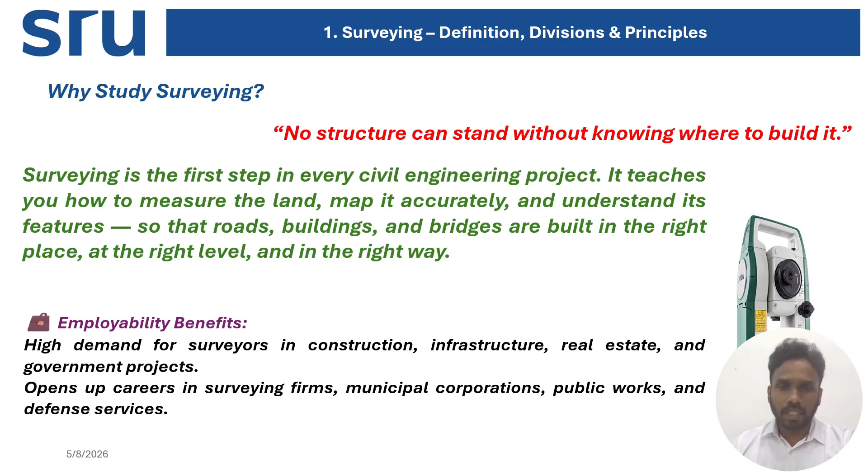So what is the employability benefit of studying surveying? There's a high demand in construction, infrastructure, real estate, and government projects, because for everything you need a surveyor to start your construction. It opens up surveying firms, municipal corporations, public works and defense services. They completely depend on the survey engineer to initiate any construction work.

Now we're going to see the definition of survey. Surveying is a science and art to determine the relative position of a point above or beneath the surface. You have to find the point. For example, if you are constructing a house, first you should regulate your boundaries. Your boundary should be identified. That boundary has some endpoints where you are marking or starting.

Within that boundary is your land, you can do whatever you want, but it shouldn't go into other boundaries, because they belong to someone else. So to locate that point on the ground, either on top or below, it can be done with direct or indirect measurements: you need distance, direction, and elevation. Collecting this data required for mapping, construction, and land development is called survey.

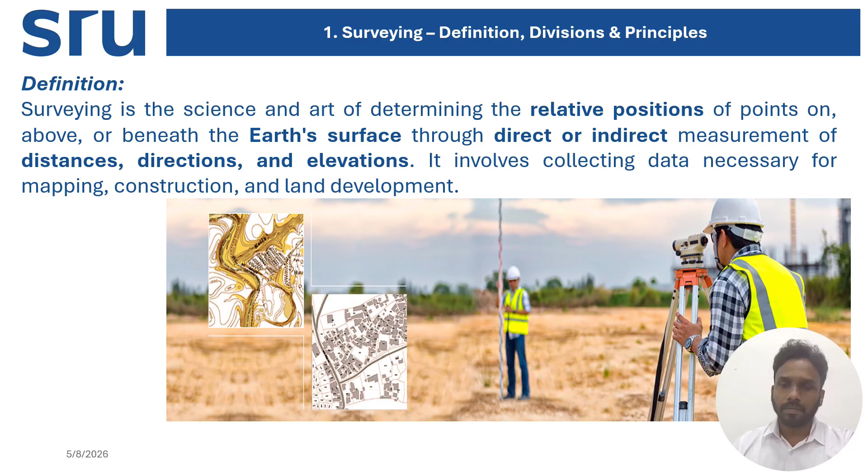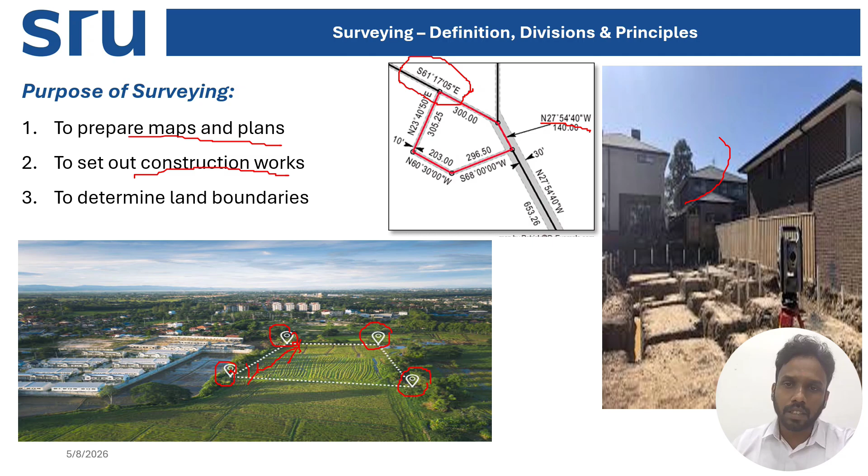Then, to set out construction work. You can see in this picture a construction work going on. You are going to set out the boundaries. First you set out the boundaries on these lines, then you mark your plinth beam as required. Everything can be done with an instrument, the theodolite. That is setting out your construction work.

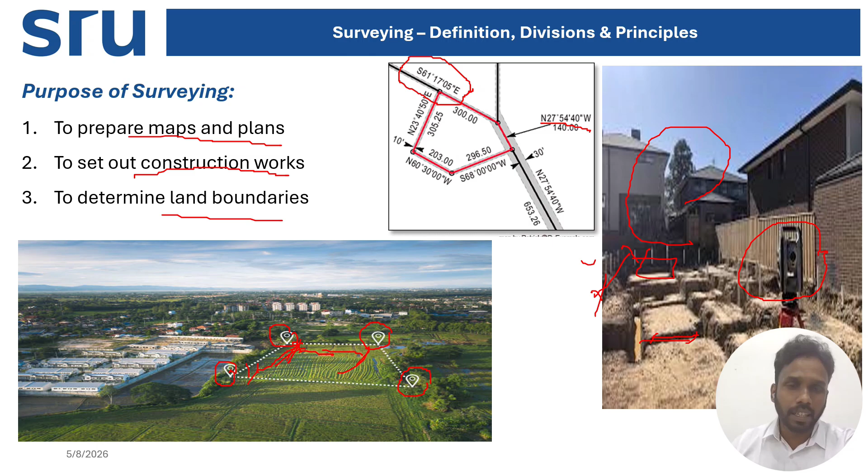Then determining the land boundaries. You can determine the land boundaries and measure the length of your boundary. From your measurement book, you can transfer that to your ground area, which is mandatory for your survey. These are the purposes of survey.

Then divisions of surveying. There are two divisions: one is plane surveying, the next is geodetic surveying. What is plane surveying? In plane surveying, you assume the earth is flat, and it is used for small areas. You assume the earth is flat, but actually the earth is not flat.

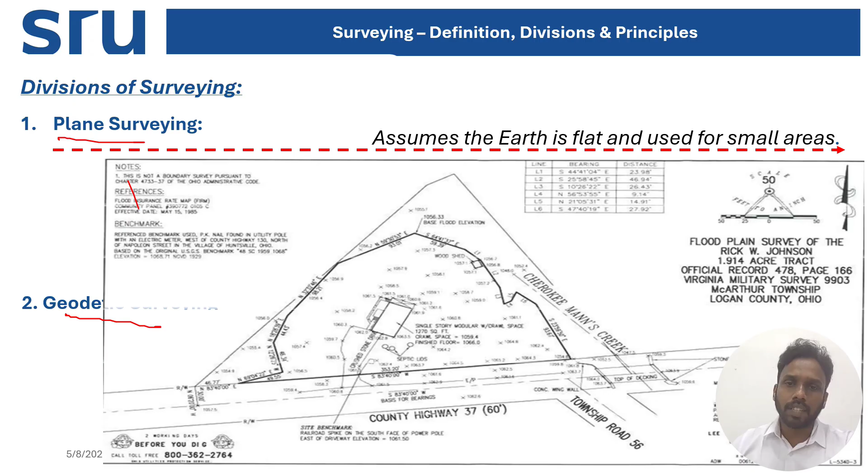So next, going to geodetic surveying. In this, you are considering the earth's curvature, used for large scale and precise surveys. Okay. So if you are doing your surveying for a very huge area, then you have to consider your earth as curved, so you can make your measurement very precisely.

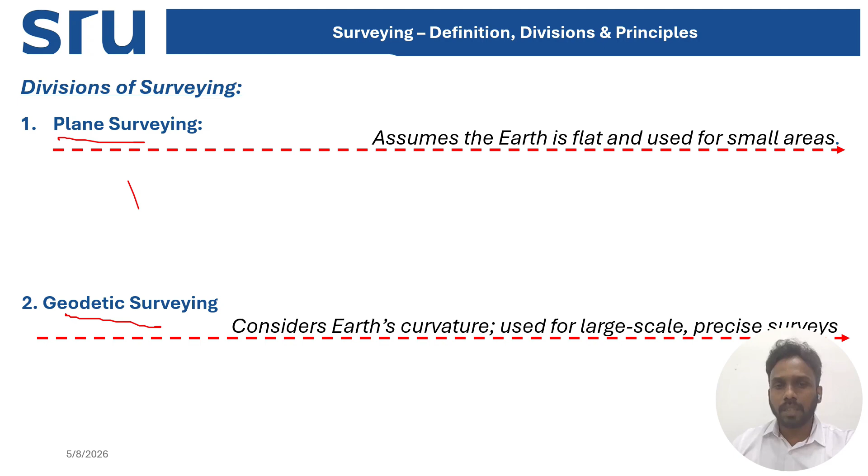So based on purpose. Okay. How you are classifying your surveying based on purpose. First one is topographical survey. Next one is cadastral. Next, engineering, hydrographic, and the next one is astronomical survey.

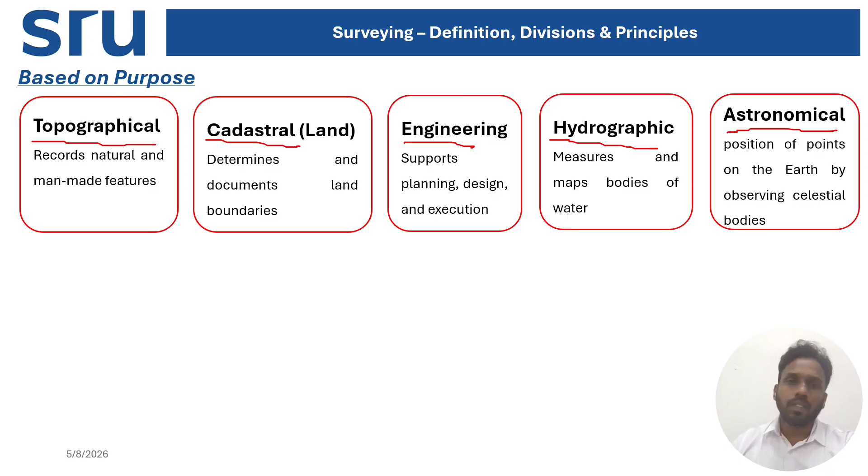When you're doing your surveying in a huge area, especially for road construction, railway construction, or any other work done by a government, then this engineering survey is supportive.

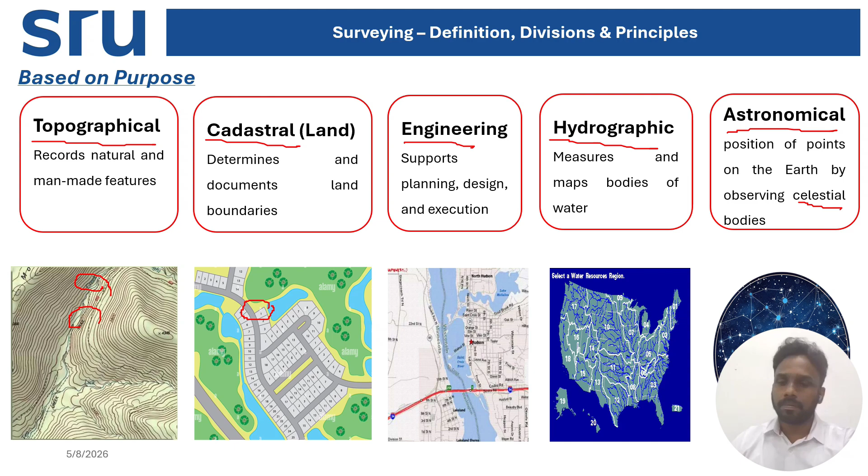So what they'll do first, they will fix the outer boundaries. From the outer boundaries, they'll start measuring the inner area, which will give an accurate, precise value of your entire area. This is suitable for a smaller area because you are fixing your boundary. When your boundary is small, you can directly measure from the outer area, quantifying the area inside your larger area, which gives an accurate measurement of your particular plot.

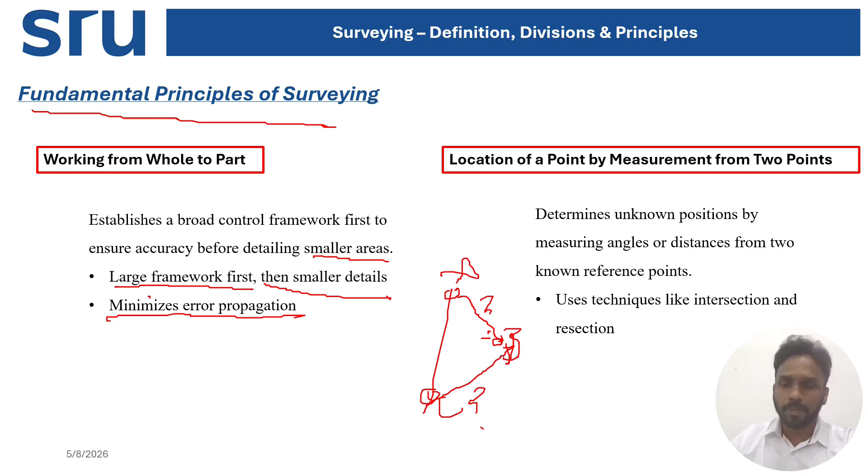Then you are segregating your area into smaller triangles. You may have a question why we should divide your area into smaller triangles. You can use a rectangle, a circle, a triangle, or a square. But the thing is, only triangle is a shape which can easily accommodate any irregular shape.

Even though your shape is irregular, you can divide your entire area into small triangles. If you are dividing your area into small triangles, you will not leave any vacant space which is not measurable. That is the reason why we go with triangle shapes to fit into the irregular shapes of your plot.

So when you are adding all the areas of all the triangles, you'll get the total area of your irregular plot. You can cross verify it with your book because you are paying for each and every square foot of area. You shouldn't encroach other area, but you shouldn't lose the area that belongs to you. So everything is paid, everything is accountable.

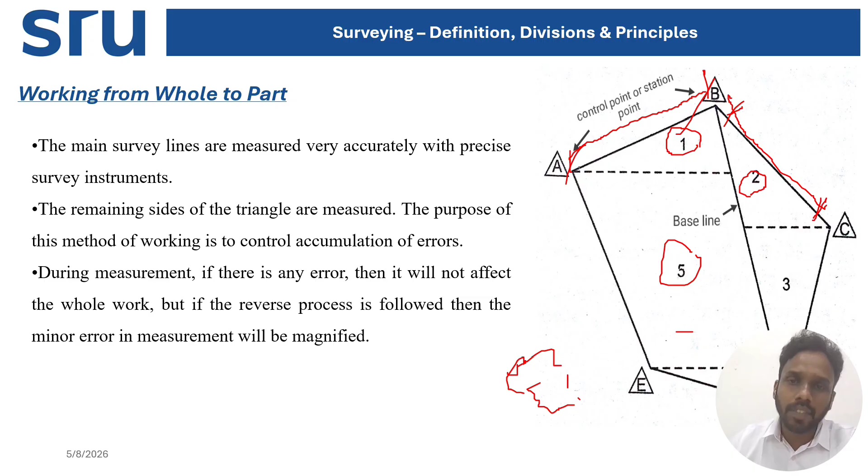So the thing is, you shouldn't encroach other area, but you shouldn't lose these things. So if you are dealing with these kinds of plots, you can use this working from whole to part method.

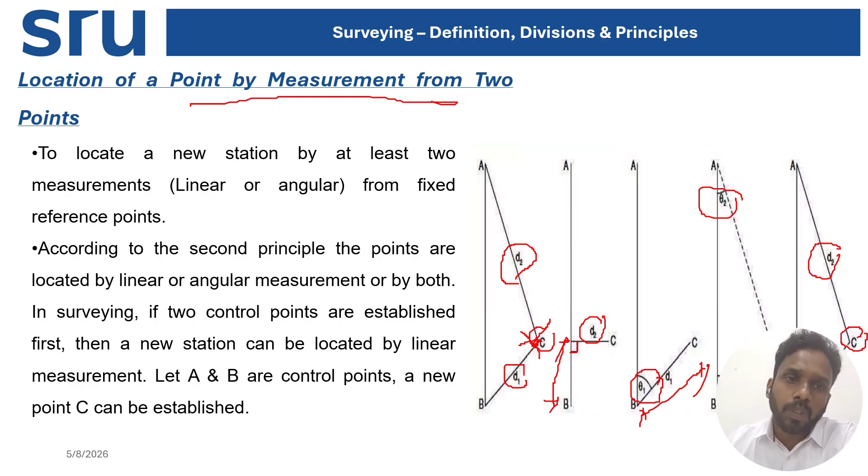This kind of measurement is called location of a point by measurement from two points. So these are the two principles of a survey.

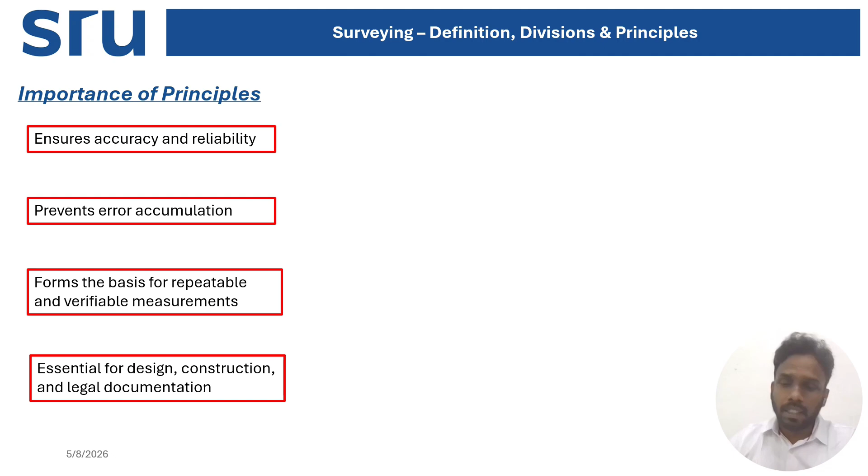Next, what are the importance of principles? First, it ensures accuracy and reliability. Surveying principles guide precise data collection and minimize mistakes. As discussed earlier, there are two principles required to reduce error, since there are huge possibilities of human error that should be eliminated.

Next is prevent error accumulation. There are two types of error: one is negligible, one is cumulative. If it is a cumulative error, you have to restart your entire survey from the beginning. To avoid this, you use the principles of surveying, which avoid compounding inaccuracy across the project area. If you are measuring distances between a large number of points and you start with an error, the measurements for the entire day become wrong. This kind of thing can be avoided.

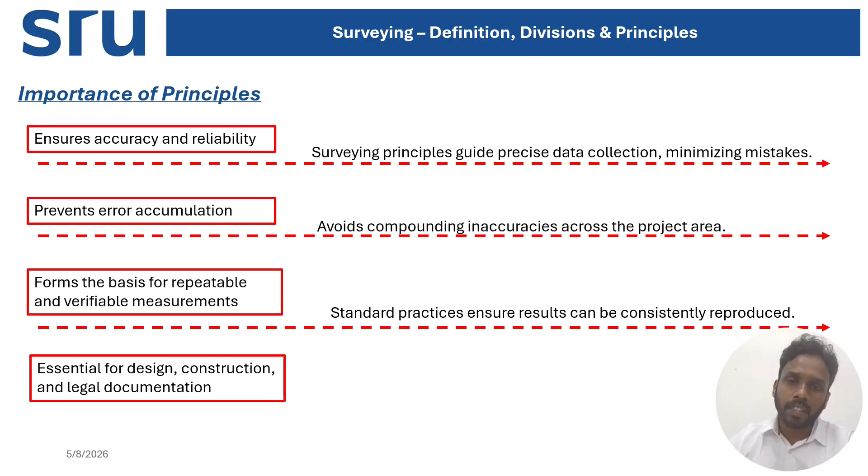Next, these principles form the basis of repeatable and verifiable measurement. If you have doubt about your measurement and you're using these principles, you can clearly verify it. This is the standard practice for both principles, ensuring results can be consistently reproduced. If you want to redo it, you can, because this is a standard procedure with standard requirements to follow.

Then, these principles are essential for design, construction, and legal documenting. Accurate survey supports safe design and execution of work, and since you are paying for every square foot of land, everything is accountable. You should not be lenient with your documenting; it should be accurate and precise. What you have paid for, you should get that land, and you shouldn't encroach other plots also.

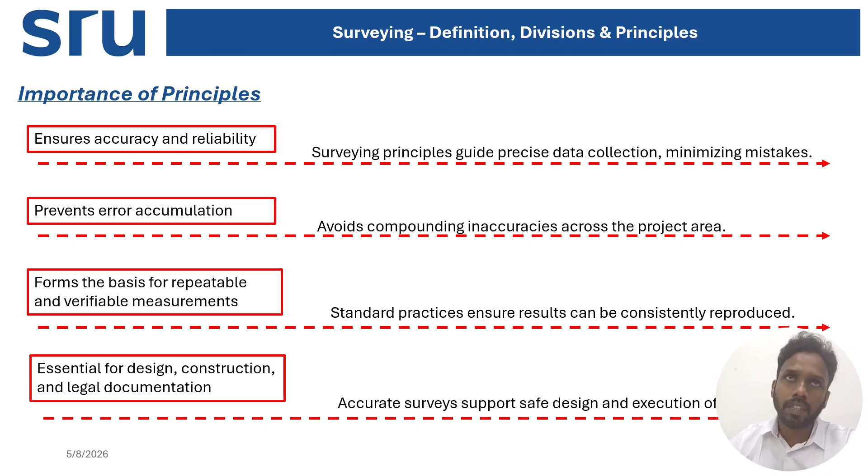Next, classification of surveying. After seeing what surveying is and the basis and principles of surveying, now we'll see classification of surveying. Here we have four things: first, based on instrument; next, based on methods.

Based on instrument, surveying is classified into chain surveying, compass surveying, theodolite surveying, plane table surveying, total station, GPS surveying, and drone and photogrammetry surveying. Then based on method: triangulation, traversing, leveling, and tacheometry.

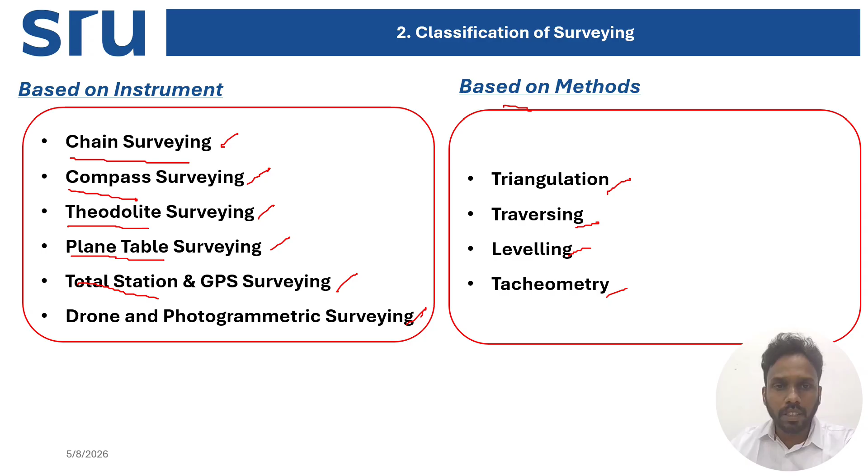When dealing with based on instrument: chain surveying is when you survey with a chain, so this depends on the instrument used. If done with a compass, it's compass surveying. If done with a theodolite, it's theodolite surveying. If done with a plane table, it's plane table surveying. We use total station and GPS for very precise estimates, called total station and GPS surveying. When dealing with drone and photogrammetry surveying, it's called drone photogrammetry surveying. So this depends on the instrument, named after the instrument used.

Then method: there are four methods. Triangulation is when you segregate your area, working from whole to part, dividing the area into small triangles. When dealing with a continuous open traverse or closed traverse, measuring a boundary with a formula to calculate area, it's called traversing. Leveling involves calculating the RL, reduced level, of your area and regulating water flow - all dealt with in leveling. When doing leveling and measuring distance to inaccessible points, that's called tacheometry.

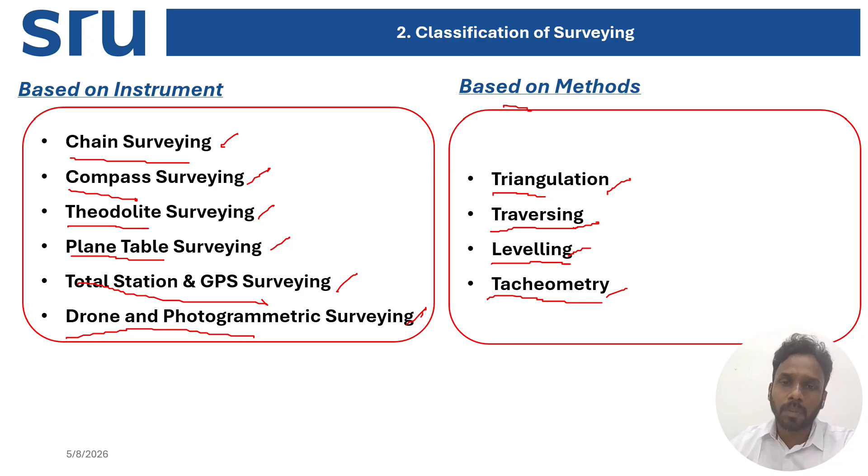Now we'll see these in detail. The first one is chain survey, the basic and simplest type of surveying. You can only measure linear measurement - just the distance - using an instrument made of a chain or tape. You cannot measure angular measurement because you cannot measure the inclination of lines; that cannot be measured. You can just measure the distance between two points. This is a simple and ancient method of surveying.

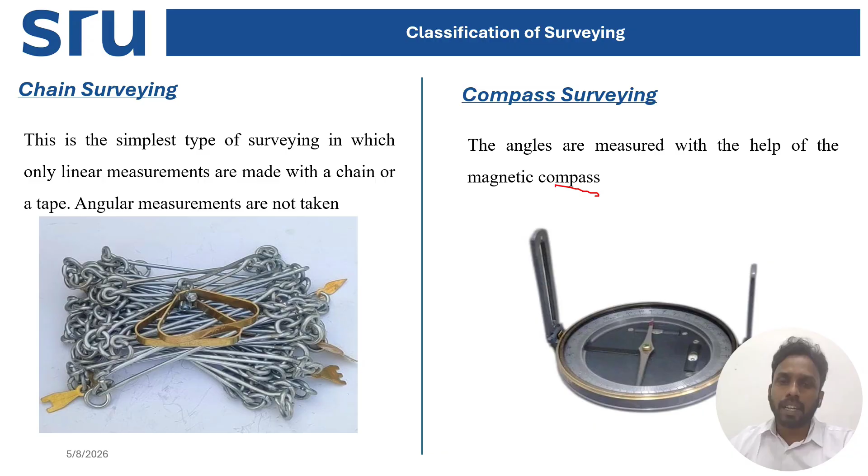Then compass surveying: when you want to measure the bearing (not an angle) between your lines, that is called compass survey. With respect to bearing, the difference between your forward bearing and back bearing gives you the included angle between your lines. That is called compass survey.

The next one is theodolite survey. When you are using a theodolite for your survey to measure your horizontal and vertical angles, this surveying is called theodolite surveying.

This instrument is a very precise instrument which is mounted on a tripod. It gives you the angle accurate to seconds and minutes.

Then plane table survey, this is an older method. This is a graphical method. In all the previous methods, you have to measure and then reproduce your results in a drawing.

Here you can directly reproduce your results in a survey, which is a graphical method in which field observation and plotting are done simultaneously.

So this is an older method of surveying. You can use it when dealing with normal surveying, but when dealing with high precision, accurate measurement, this method is not suitable.

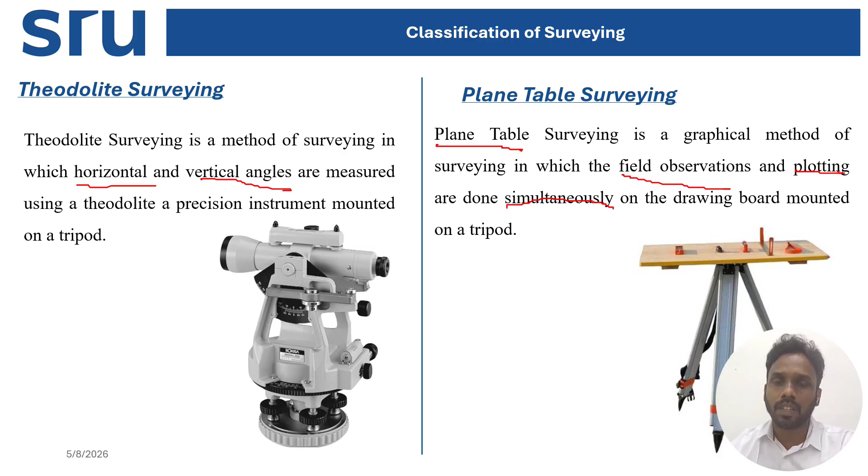Then total station and GPS. When doing measurement with the total station, you can use it. It is an electronic and optical instrument that combines a theodolite for angle measurement and electronic distance measurement for distance.

So you are using theodolite for angle measurement and EDM for distance measurement. Everything is combined in a single equipment called total station, which gives you triangulation, traversing, distance, and area. Everything can be calculated with this single instrument.

Then GPS is used to get a regulated and precise position of latitude, longitude, and elevation of a point on Earth's surface. So when dealing with a huge area, you want to locate your point with respect to latitude and longitude.

With respect to direction, and elevation can be given with this handy and sophisticated equipment. This is called GPS surveying.

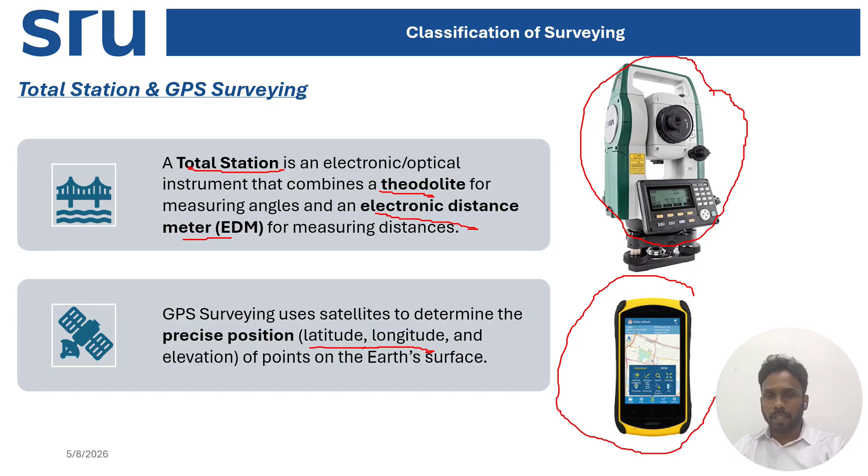The next one is drone surveying. This is the latest and most precise equipment, used for unaccessible points. You use a drone, which is called an unmanned aerial vehicle.

It is equipped with a camera, LiDAR, and other sensors to capture data on top of the Earth's surface. This is called drone surveying.

Next is photogrammetry. The science of measurement done in 3D model and 2D photography, which is often captured by drone, aircraft, or ground camera. This type of surveying is called photogrammetry, which is used very precisely to give you distance at unaccessible points.

You can easily measure these points. This is a very less time consuming and sophisticated method of surveying because you don't need a huge manpower to execute these tasks.

If you are well equipped and well trained in operating your drone, you can easily capture a huge area single-handedly, because everything is done using the drone.

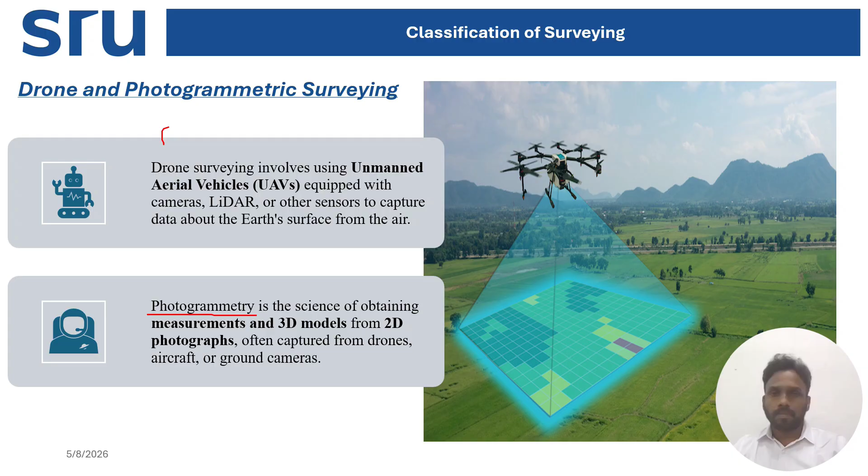Next we are going to see classification of surveying based on methods. Up to now we have seen classification of surveying based on equipment. Now we will see classification of surveying based on method.

The first one is triangulation. As we have seen earlier, measuring your area by segregating it into small triangles is called triangulation.

This is done to determine the position of points spread over a large area. We measure the baseline and angles of triangles using trigonometrical calculation, and the remaining sides are used to locate an unknown point.

This gives you the total area of your plot. So this type of measurement is called triangulation.

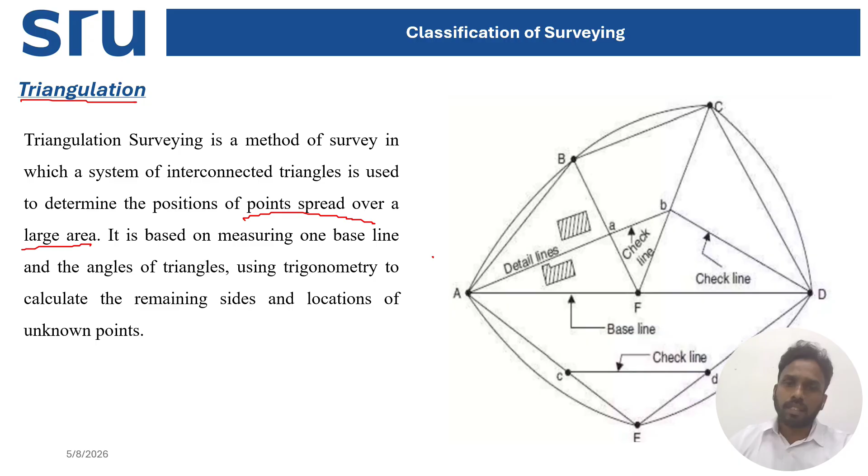Then traversing is a circuit of lines. There are numerous lines connected, and the distance between each line is measured with a compass, including the angle and distance. This kind of surveying measurement is called traversing.

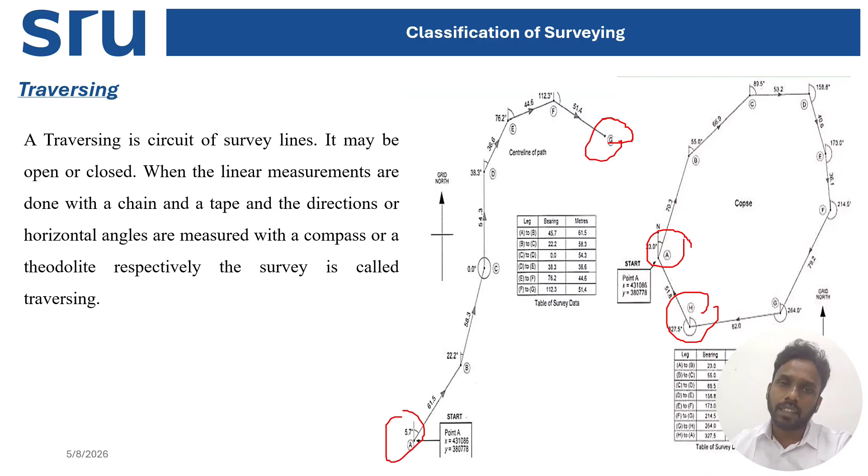The next is leveling. Before that, we saw the distance of an enclosed area with an angle. Now we are measuring heights, the elevation of your points with respect to mean sea level. Mean sea level is nothing but the average between high sea level and low sea level. This is called mean sea level.

With reference to mean sea level or a datum, you are measuring the elevation of a particular ground level or particular point. So that is called leveling. This is very widely used because to initiate your construction, you need to take your traversing, then proceed with your leveling. Everything is very precisely done because you are constructing a house which should align with your requirements, right?

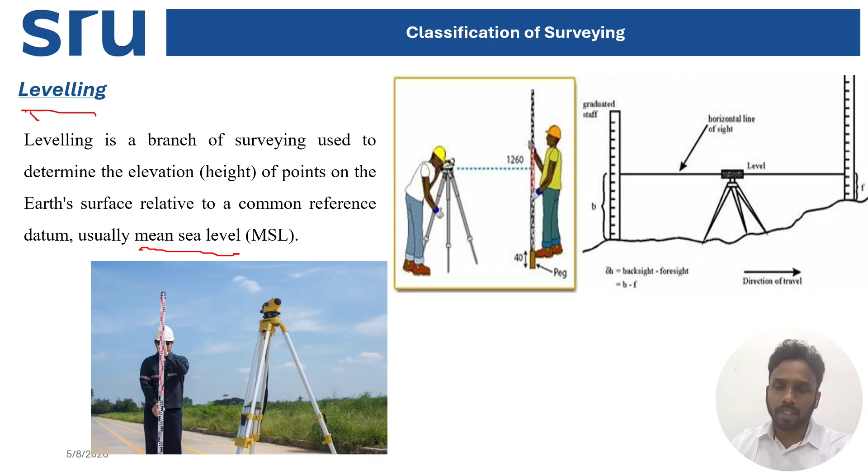Measured is nothing but physically using a tape or instrument to measure the distance between P to A. If you're using a tape or any other physical instrument, it's called measured distance, right? If you are calculating the distance with any formula, that is calculated. As I said, that's a huge difference. Here you are going to calculate the distance, not measure.

Since the distance is calculated, huge manpower is not required. If there is a huge trench in between, you cannot use your tape. In that condition, you can go with this kind of surveying technique.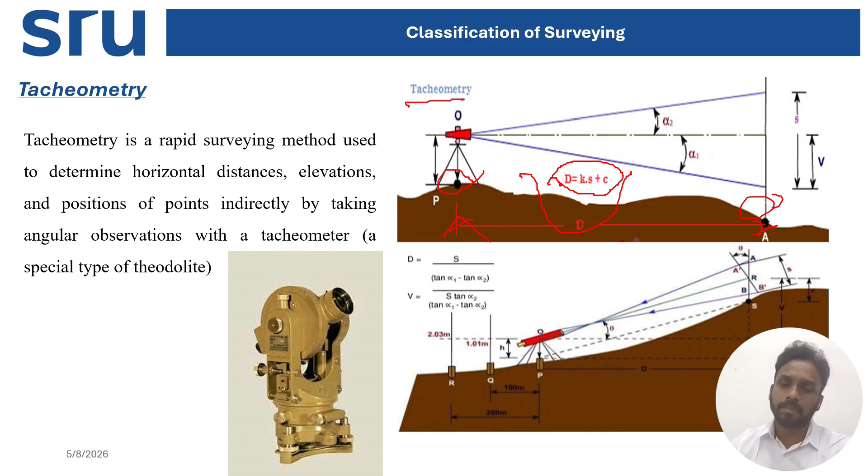I will give a broad summary of this entire thing, right? First we have seen what surveying is, the classification of surveying, and the principles of surveying: working from whole to parts, and triangulation, marking a third point with reference to a second point. Then we have seen classification of surveying based on instrument and method, starting from compass surveying and other types of surveying.

In surveying we have used chain, compass, tacheometer, theodolite. These are based on instrument. Next we have seen classification based on methods. First one is triangulation, measuring your area by splitting it into small triangles. Then traversing, of which there are two types: open traversing and closed traversing. So next, mapping, everything is done.